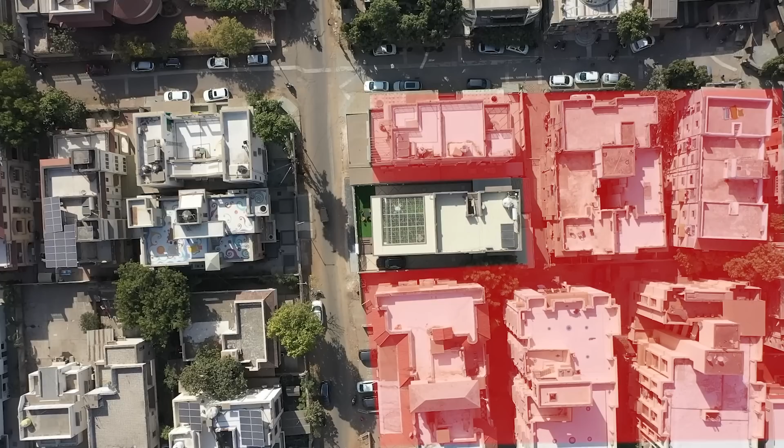The site is located in a very densely populated area of Paladi, Ahmedabad, and the site is very long and narrow, surrounded by 2 to 4 story buildings on all 3 sides and open on the front side.

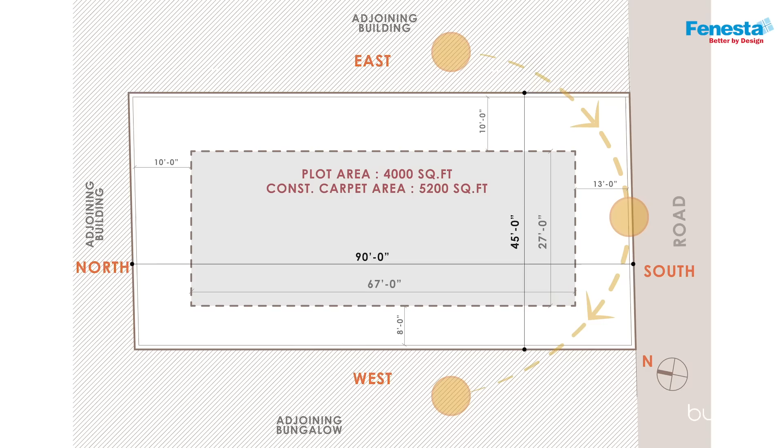The plot dimensions are 45 feet by 90 feet. The plot area we are getting is 4,000 square feet, and the proposed carpet area is 5,200 square feet. This is north, this is south, and this is our sun path.

After leaving required site margins and setbacks, the floor plate we are getting is merely 27 feet by 67 feet. So the only frontage we are getting is 27 feet, which is the main source of light, ventilation, as well as visual connection from the main society road, and which was a cause of worry for our client in initial stages.

The client had a simple brief of a 4-bedroom house along with leisure spaces including a party lawn which could accommodate at least 25 to 30 people at a time.

He wanted this space interacting with nature through air, natural light as well as rainfall. He also wanted an elegant structure which could have its own character in the middle of the buildings surrounding the site. He wanted his building to be connected not only physically but also visually with the outdoors.

The client belongs to a Jain family, so with respect to his religious belief, he didn't want any kind of natural planters or lawn in his bungalow, but at the same time he wanted a feel of greenery as much as possible.

Basically, we have divided this floor plate into 3 zones. The front zone accommodates public activities, the rear zone accommodates private activities, and the central zone is for semi-private activities, segregating both the front and rear zones.

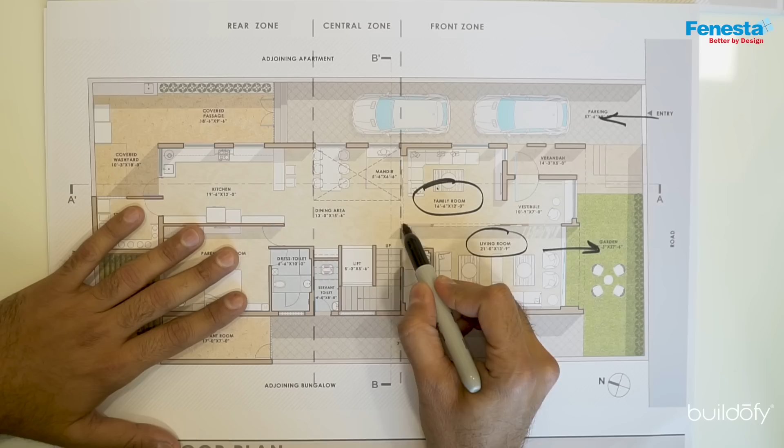This is the living room which is directly connected to the garden space on the main road side. This is the family sitting room. We have provided a glass partition which differentiates both areas and segregates both activities as and when required.

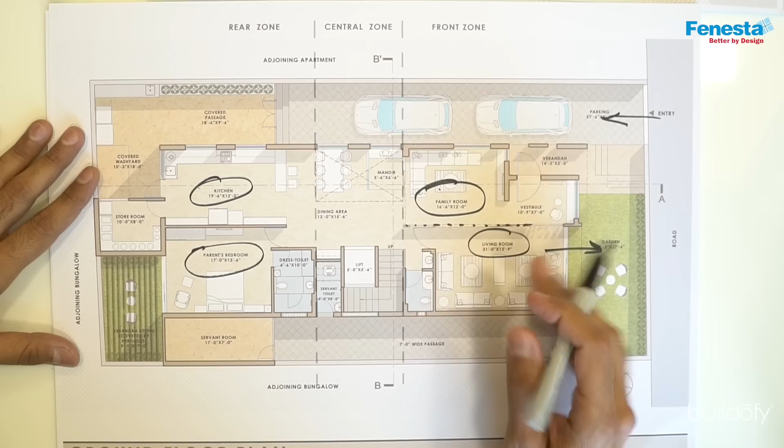The front zone activities are directly connected to the main road, and in the rear zone we have placed the kitchen and parents' bedroom. The kitchen is directly visually connected with all common activities, and the parents' bedroom has its own semi-covered leisure space in the rear side.

In the central zone, we have provided a lift and staircase to minimize movement between the front and rear zones. This zone has a triple height volume along with triple height windows on each side above the dining and mandir area.

If we cut a section from here, this becomes the core of the house, and by keeping triple height windows, this becomes a tremendous source of light from each side.

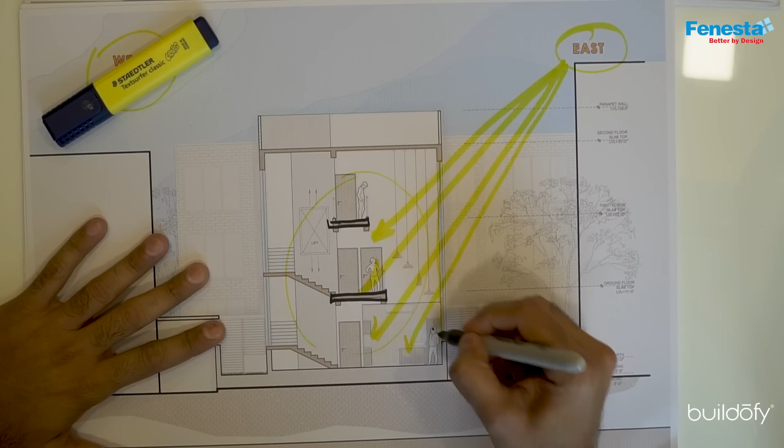We have created staggered cantilever passages, so if someone is standing on the ground floor, he can easily communicate with the upper levels. As well, if someone is standing on the upper floors, he can easily communicate with the relevant floors.

As we move up through the lift or staircase to the first floor, we arrive on the cantilever passage, which gives a feel of hugeness and vastness of the spaces.

This cantilever passage is connected with the master bedroom on the front side and 2 other bedrooms on the rear side.

The elevated garden, which is connected to the large size master bedroom, provides the user with a way to get closer to nature.

Coming to the second floor, this cantilever passage connects to the triple height volume above the dining and mandir area, and opens up to the front semi-covered huge terrace garden. It also connects to a huge entertainment room in the rear side.

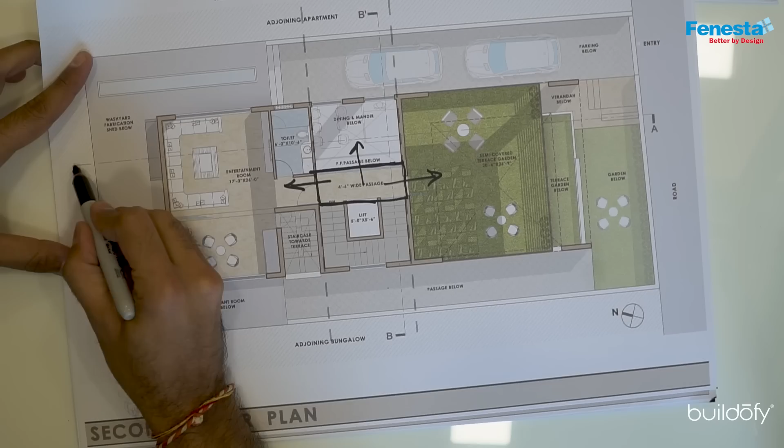When we cut a section from here, the house is visually connected with all floor levels in the central zone. Similarly, it has been connected with the outdoors from the elevated terrace gardens.

To curtail the cost of elevation, we focused more on developing the front zone and treated the other faces minimally, as the surrounding buildings were blocking the vision beyond the front zone.

To get elevated terrace gardens on the front zone, we planned all the activities in such a way that we push the activities to the rear side. So as a result, we got the front open.

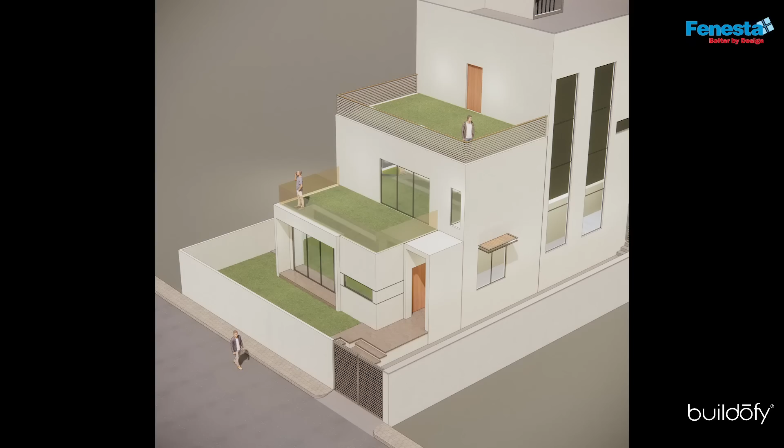In the next stage, we selected a frame as an elevation element to shade the front veranda and also to get privacy. To shade the first floor terrace garden, we stretch this frame vertically as well as horizontally up to the first floor slab level.

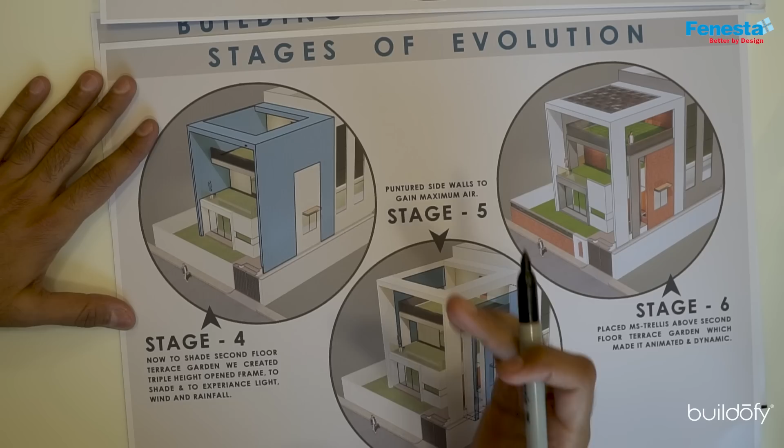To shade the second floor terrace garden, we created a triple height open frame to fetch natural light, air, as well as rainfall.

To fetch the very good wind from the south side, we punctured the side walls of this triple height vertical frame. And the best part of the stages of evolution is that we placed a geometrical pattern of MS trellis on the top level.

This MS trellis creates a very beautiful shadow pattern on the brick wall as well as on the floor, as per the change in position of the sun.

To get maximum daylight in the house, we proposed large openings. To reduce carbon emission, we proposed solar rooftop and solar water heater.

In Ahmedabad, summer goes very high, so to protect from harsh light on the south side, we created interesting frames on the south face, which create large shadows on the south wall and help reduce the inside temperature.

The material palette is robust yet modest. We tried to use natural materials to make this project sustainable with nature.

For the exterior, we used three materials. The first is a wooden figured modified clay material. The second is stone-crete white texture, and the third is red brick cladding.

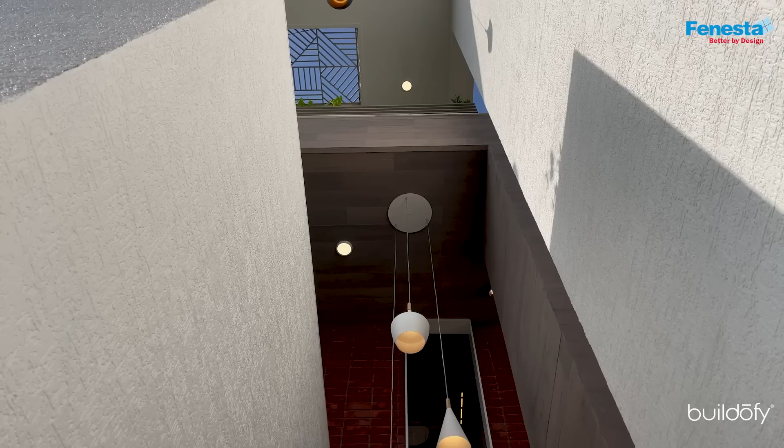Along with this, we used MS trellis at the top of the second floor terrace garden, and to give harmony, we also used this on the compound wall and main gate. This is an artificial lawn which we used on the elevated terrace gardens to make it maintenance free and insect free.

For the interior, we used mainly three materials in the entire house. A soothing combination of this veneer, which is a cherry polish veneer, and a beige PU polish, and this 8 feet by 4 feet tile having a marble print on it.

So these three materials have been used in the entire house, and this is the volcano stone which we used in the backdrop of the living room with this fabric in the sofas.

We used this modified clay material, which is a kind of jute finish, in the master bedroom backdrop with the inlays of bronze mirror.

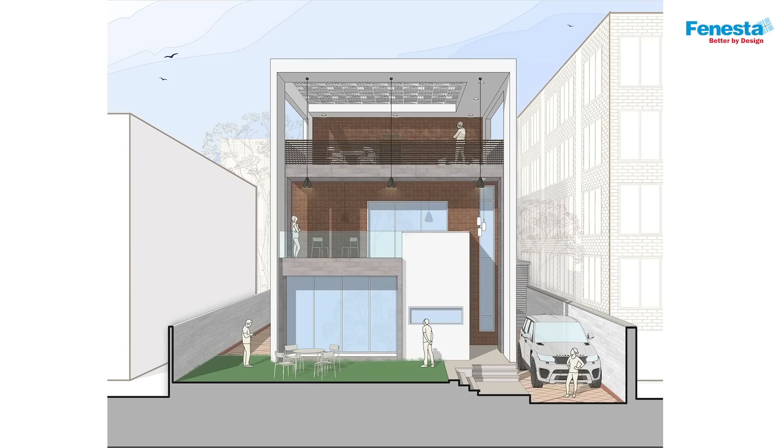This was the proposed 3D which we gave to our client in the very initial stages, and this is the actual result which we delivered through our sensible planning, resource management, site management, and a very thoughtful selection of different materials, all within the budgetary frame set by the client.

A multitude of massive frames at various levels, spacious semi-covered green terraces at all floor levels, getting animated with the play of light, and a unique experience of varying volumes right from the entry. All this is probably how we can sum up, very briefly, the spatial experience of the shaded house.